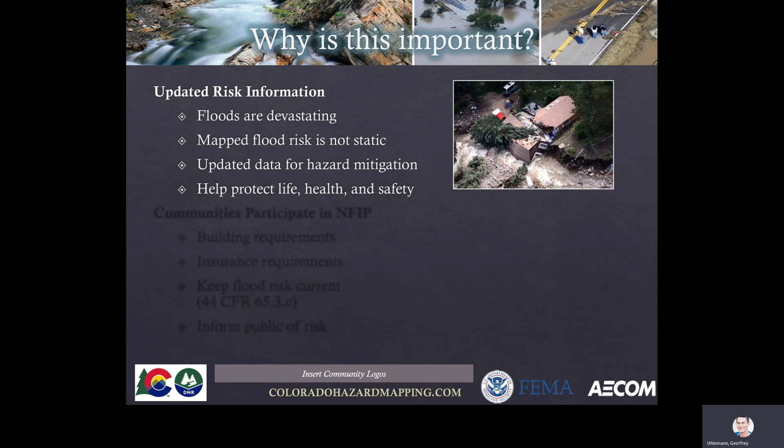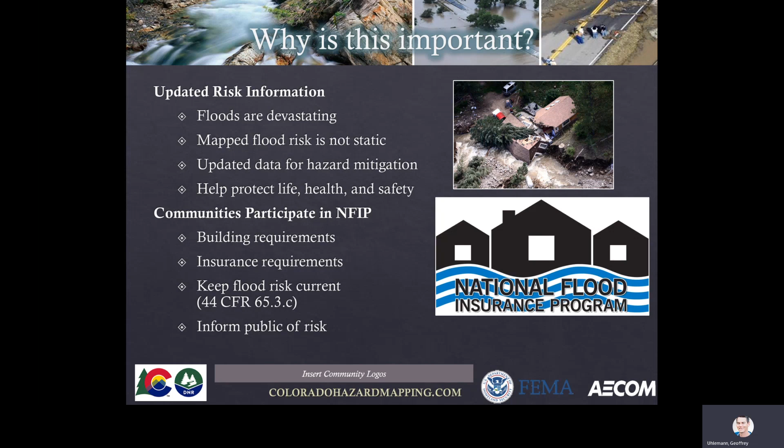There's also an official requirement for any community that's participating in the flood insurance program that this mapping information be kept current. And those participating in the NFIP, there's specific building and regulations that are associated with the program. There's insurance requirements for homeowners. And like I mentioned, as part of the Code of Federal Regulations, those communities are required to keep flood risk current and to also update or inform the public of that risk information.

So a little bit of background on the NFIP. It's a voluntary program that communities can elect or opt into. And if you're part of that program, then you can receive disaster grants and information or helpful resources after those occurrences. And then also it allows homeowners to buy insurance based on what zone they're in. If the community does not participate in the NFIP, then an individual homeowner cannot purchase insurance through that program.

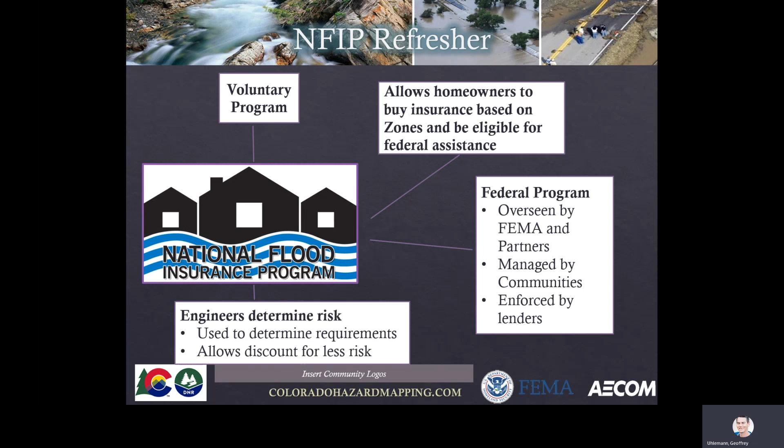And this is a program that's overseen by federal agencies, primarily FEMA and FIMA. And it's managed by the communities, enforced by lenders, and then informed often by the state. So our role here as a mapping contractor to the Colorado Water Conservation Board is to determine that risk and provide that information on flood insurance rate maps that are used by the National Flood Insurance Program.

So in terms of who's involved, there's community officials, so the local level, the state level, FEMA or the federal level, and then private stakeholders. And here's kind of an overview of some of the individual responsibilities for each of those roles. Primary message here is it is a partnership with each person kind of playing their own role.

The local community has to administer the NFIP, communicate the risk to the public, and manage local construction and enforcement of regulation and ordinances. The state is often the leader in the study with initiating these studies and overseeing them and partnering with FEMA in terms of funding.

And then often has a contractor like ourselves to help create some of that mapping information. FEMA manages a lot of the requirements, guidance, the technical specifications, and the funding for the study, and they also manage the NFIP, like I mentioned earlier. And then at times there's private stakeholders, such as like a watershed coalition that would help oversee making sure that correct data is incorporated.

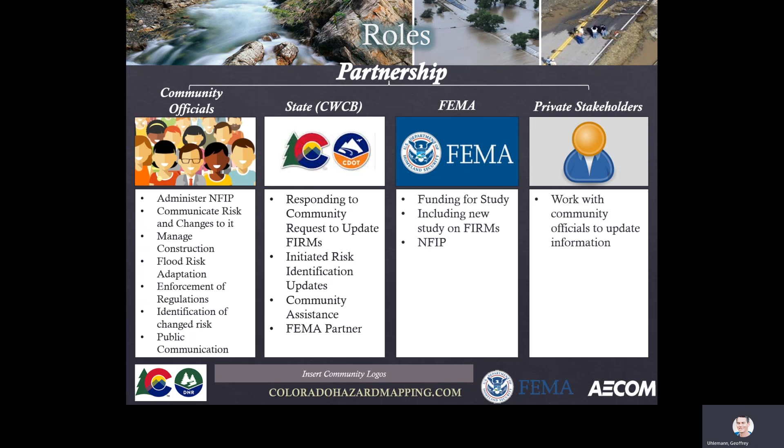In terms of what a typical study would look like in timeline, I'll go over that now.

We would typically include information on this slide here, but you can go to our website at the bottom: coloradohazardmapping.com. There's a story map, and you can find that information on your particular county level, and then you can also enter your home address if you'd like to look at a specific location.

In terms of what a typical process involves, first is collecting terrain data, which reflects the ground surface. That's usually done with something called LiDAR, which stands for light detection and ranging. It's basically flying a plane over the ground surface and bouncing different spectrums of light, and you can see the contours of the surface.

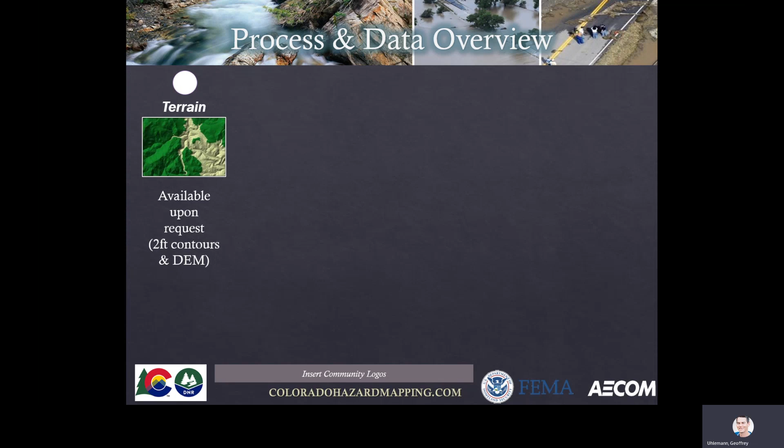Then we create a digital elevation model. Typically, this data is available upon request, either in the form of 2-foot contours or a DEM, digital elevation model. If it's a detailed study, we'll supplement it with field survey. This can be information from the actual channel dimensions below the water surface, or at any structure or crossing, such as a bridge, a culvert, a dam, a pipe, etc.

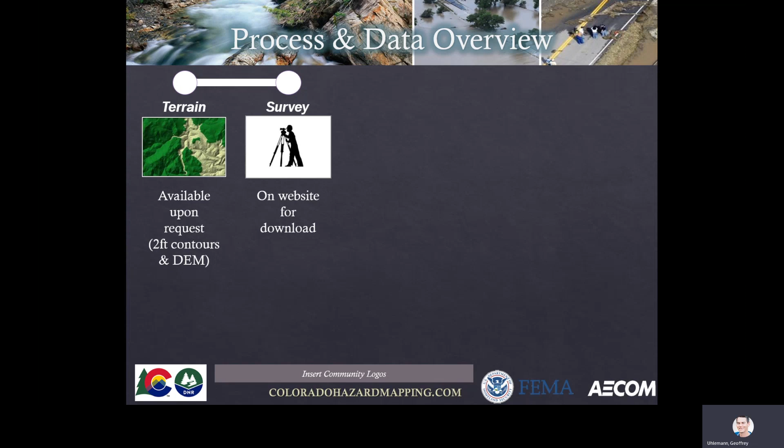And we'll put that information into our models. We also do hydrology, which is basically a study of how much water would occur during specific events based on probabilities. This is often done with stream gauges or rain gauges, but it's a statistical approach to figure out how much water would happen.

And that information's on our website. It'll show all the flow change locations that we used. And that gets put into a hydraulic model, which is also online.

Hydraulics is basically: if you were to have a certain amount of water from hydrology that's put through a cross section based on your terrain and survey, and you assign roughness and different structures, hydraulics figures out how high that water surface elevation is.

We take that water surface elevation and we interpolate it between modeled cross sections, and then we plot out a floodplain, basically where the edge of that water surface elevation meets our digital elevation model. That extent shows what we're calling our floodplain for the different recurrence intervals, and that information's on our web viewer as well.

By the time we get to this point with the public meeting, it's because the preliminary flood insurance rate maps have been provided to the communities, and it initiates a formal process of going through review, and then if accepted, they'll be adopted.

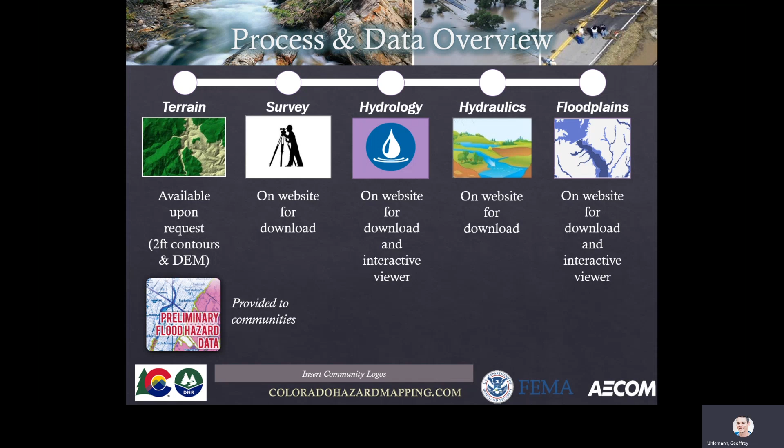If we use time 0 as when the preliminary flood insurance rate maps are first issued, then typically about a month after, we hold an official meeting called a CCO with the communities—that's with the officials. Following that meeting, maybe a month after, so 2 months after prelim, is when we typically hold one of these public meetings to overview all this information with the public.

We always try and do that before the appeal period begins. The appeal period might start another 2 months after a meeting like this. It'll begin after the issuance of newspaper articles, and those will start the 90-day period, so it'll end, let's say, 7 months out.

That is the official period during which they'll receive comments on any of the study information, and I'll go into that more later. Depending on what comments are received, maybe 8 to 12 months after the preliminary flood insurance maps are released, that might be when everything's finalized through a letter of final determination, after which there's a 6-month period for communities to adopt it.

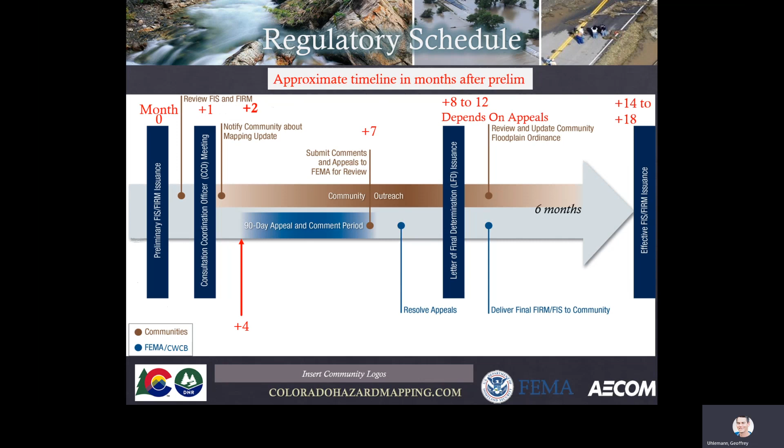So continuing through our outline, I'll show you some generic results in terms of what floodplain mapping looks like. The first question we need to ask is, do these results that we're mapping depict actual flooding? The short answer is no, but it could. What we're mapping are hypothetical or predictive simulations.

When we talk about the 100-year floodplain, it's actually properly called the 1% annual chance. That means in any given year, there's a 1% chance that a flood of that magnitude could occur. We're not trying to replicate a historic event that's already happened. We're looking at our record of data and statistically deriving potential events, like a 1% or a 0.2% chance, which we often refer to as a 500-year floodplain.

But in reality, we know the results may actually differ. Some of this is because our models are based on data at the time it was collected, which in some cases might be 2 or 3 years old by the time we get to this point, based on whenever the terrain was collected. We also know that in reality, sometimes logs or mobile homes or debris will create dams, causing water to move outside of the channel, and those things can't be predicted. So if the mapping looks different than what you've personally experienced, that could be one of the reasons why.

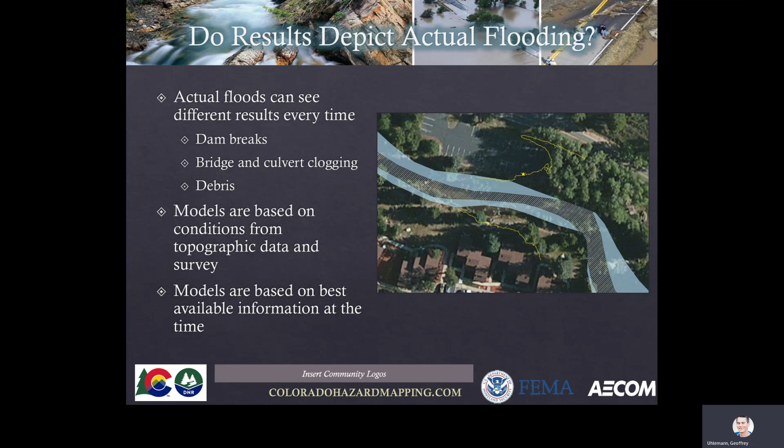In terms of what a flood insurance rate map might look like, here's an example with typical symbology. Running through the middle, kind of looking like a candy cane with red and blue hatching, that's called a floodway. That's part of the 1% or the 100-year floodplain, but it's a developmental portion. It has an additional regulation piece to it, but it's still part of the 100-year floodplain, which you see here in blue, called Zone AE.

So anything that's a Zone A, whether it's AE, AO, AH, or just A, is going to be a 100-year or 1% chance floodplain. AE specifically denotes an enhanced or detailed portion. What you see in orange is the 500-year or 0.2% chance, often called a shaded X, which has different connotations. It's not part of the special flood hazard area. Anything in the special flood hazard area, basically your Zone A's, has different insurance requirements - it's a mandatory purchase if you have a federally backed mortgage.

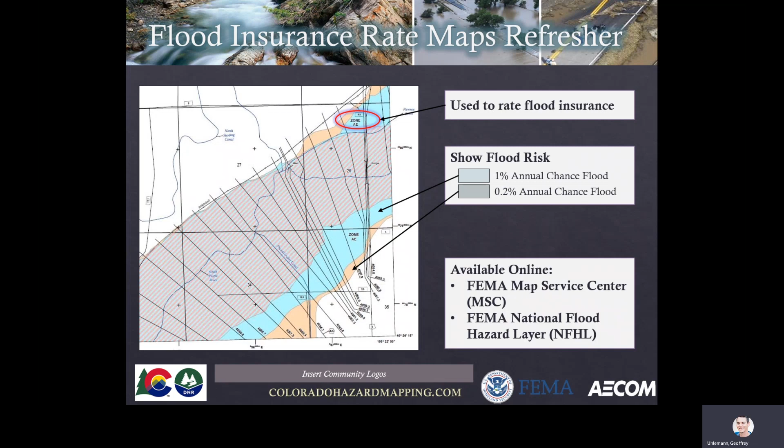The black lines going across that are generally straight are cross sections, so this would have been modeled using a one-dimensional model. You have a cross section at each one, and it interpolates between them. A 2D model would look different, often having a mesh or grid overlaid on the area. All this information you can find on FEMA's Map Service Center or the National Flood Hazard layer for current effective mapping, as well as anything preliminary, which should be your county by the time we're at this meeting.

In terms of floodway, this is a developmental restriction, and the sentiment behind it is to not impact your neighbor. So when we model this, we encroach on each side with approximately equal conveyance in order to see how far you can come in from the edges of your 100-year or 1% floodplain before it raises the water surface elevation by a half foot.

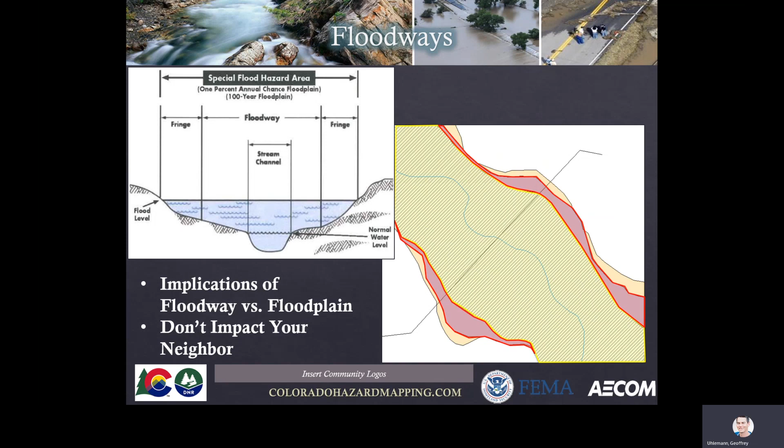At least in Colorado, it's a half foot. The reason why is you don't want a developer coming in, putting in a large warehouse that constricts flow and raises the water surface elevation by over a half foot, now flooding your property. So it's a way of protecting future development. Anything outside of the floodway we refer to as the fringe.

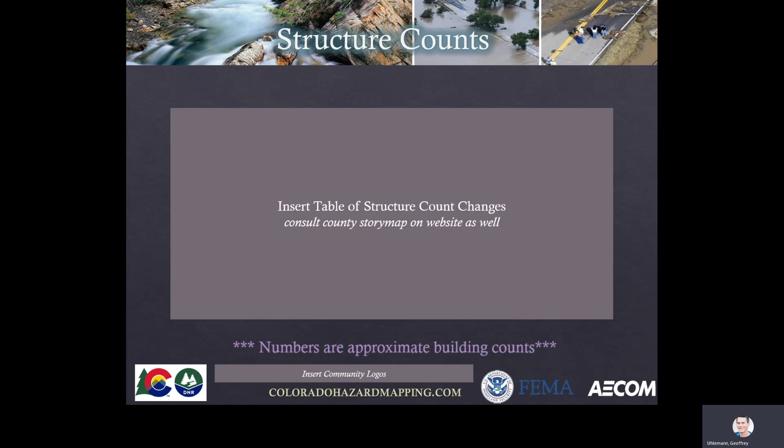This slide is a placeholder for where you might see structure count information in terms of changes if you're already in an effective floodplain - those that might be added in or mapped out - but you can find this information as well on the website.

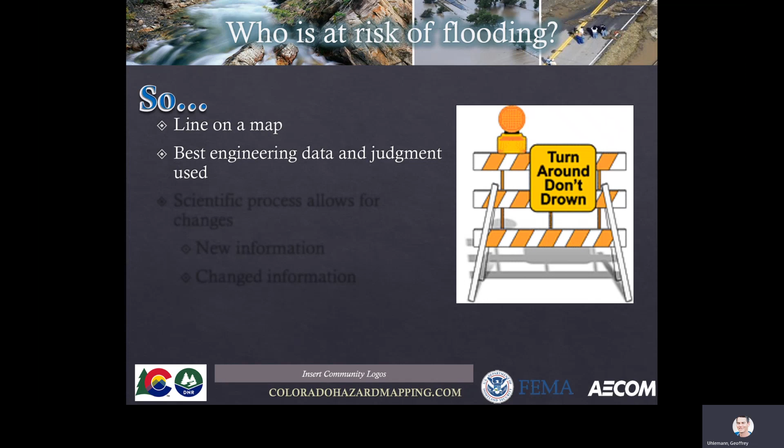The takeaway here is in terms of who is at risk of flooding, keep in mind this mapping is a line on the map and it's a best estimate, but it's not absolute, and floods don't care how we actually map it in reality. We're doing our best engineering judgment using data available at the time, but things can change and there can be new information and new conditions. So really everyone can be at risk of flooding to some degree.

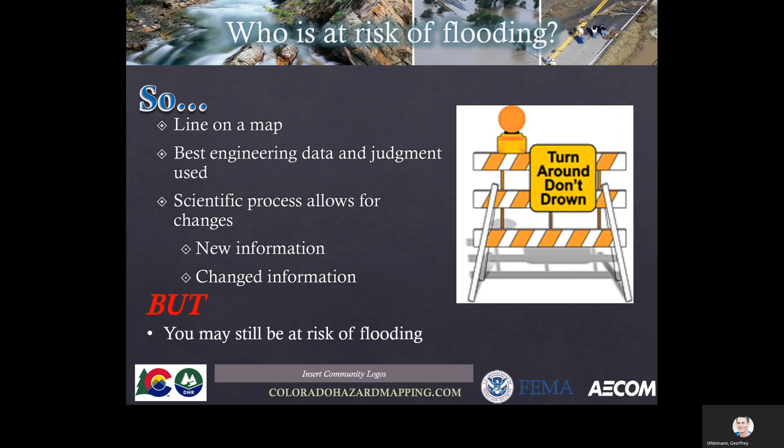So to wrap this up, we're going to look at some information on insurance, appeals, and additional resources.

When it comes to insurance, if you've already been in a floodplain and now you're being mapped into a different zone, the requirements might be slightly different depending on what zone you're in, but the program requirements haven't changed—it's just that your risk profile at your specific location has. In the NFIP, insurance is required for any federally backed mortgage. Your lender will require insurance if you're in a special flood hazard area, anything with a zone A. However, lenders can require flood insurance anywhere based on their own discretion, so even if you're outside a special flood hazard area, they might require it anyway—that's up to them to decide.

Also, in terms of the federally backed mortgage, if you own your home outright, that mandatory insurance purchase requirement isn't applicable. It becomes optional—we would still recommend it, but it wouldn't be required. You can purchase insurance anywhere within the county; you don't have to be within an actual mapped floodplain. You could be outside one, and the rate of your insurance will be affected by what zone you're actually mapped in, so we'd still recommend looking into that.

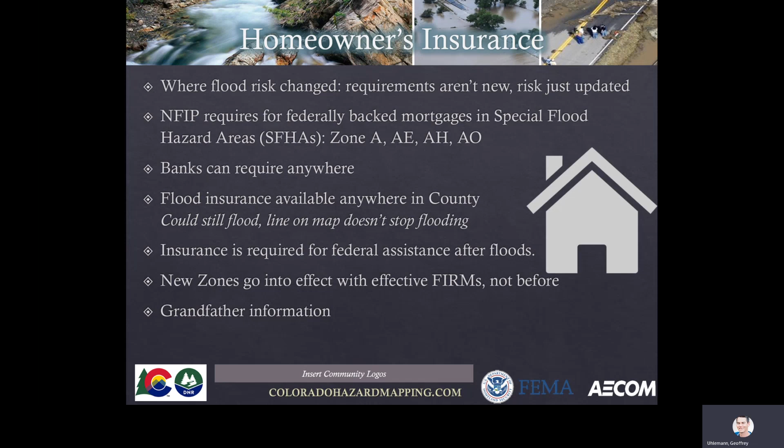So on that note, you could get a preferred policy now, depending on if you're going to go from a lower risk to a higher risk zone. You could buy now, get a better rate, and be grandfathered into that. There are a lot of nuances that go into grandfathering. The takeaway here is you could get a preferred policy before you're mapped into the floodplain.

Also remember, this doesn't mean you're at no risk if you're outside a mapped floodplain. You could still consider purchasing flood insurance. Based on the base flood elevation—the water surface elevation of the 1% flood—and how that compares relative to your structure information, that may impact your rates as well, and how you are grandfathered in if you did choose that route.

And let's say you wanted to change this—you could look into different options, either a letter of map amendment, a LOMA, or a letter of map revision, a LOMR, and we'll talk about those shortly.

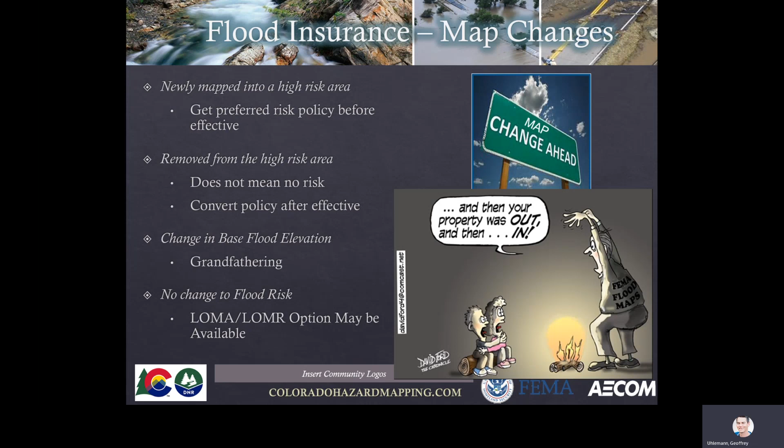As I mentioned earlier, there are development implications, and this will vary by county, but any community participating in the NFIP does have to enforce certain building restrictions, requirements, and ordinances surrounding that. So you'll want to talk with your community about what specifically affects you.

It's noteworthy that there are more restrictions if you're within a floodway—it's more difficult to build or rebuild. The best person to talk to would be your floodplain administrator, as the rules do change by community.

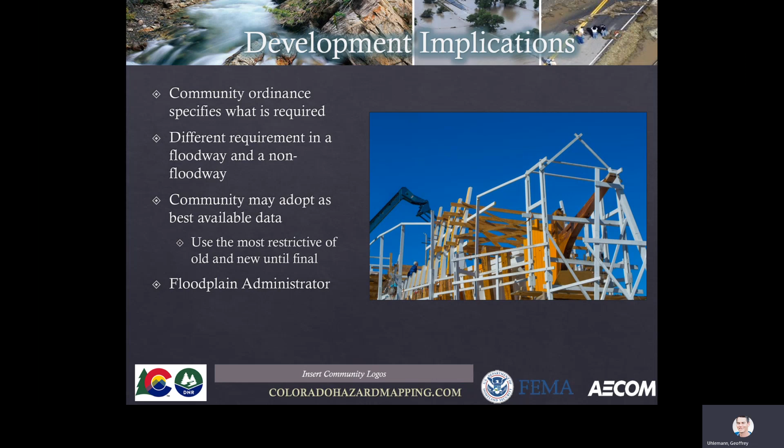So maybe you're asking, what can I do with this information? Is there anything I can do to change it? The short answer is there are a couple routes you can take, but in terms of the information as it stands, you can change it if you have technical data to support it. Simply saying 'it hasn't flooded before' or 'that wasn't my experience' or 'I disagree with this' isn't enough. But if you have technical data such as survey information, new topographic data, or an actual hydrologic analysis, that could be reviewed and incorporated, and if approved, it could change the study information. That would appeal the existing preliminary maps before they become effective.

Now, if you wanted to wait until after that process, or let's say you're doing changes or improvements after the study was already conducted or initiated, that would be captured later in a letter of map revision. For it to be an appeal, it has to be data that existed when the study was conducted.

Now, if you don't need to change the mapping itself, but your structure is higher than what's reflected in the mapping, your structure itself could be pulled out of the zone designation through a letter of map amendment. That would change your structure assignment without actually doing a new study or new mapping.

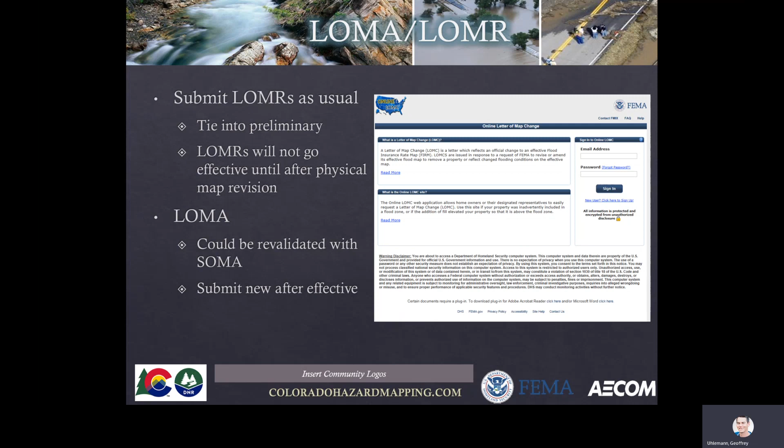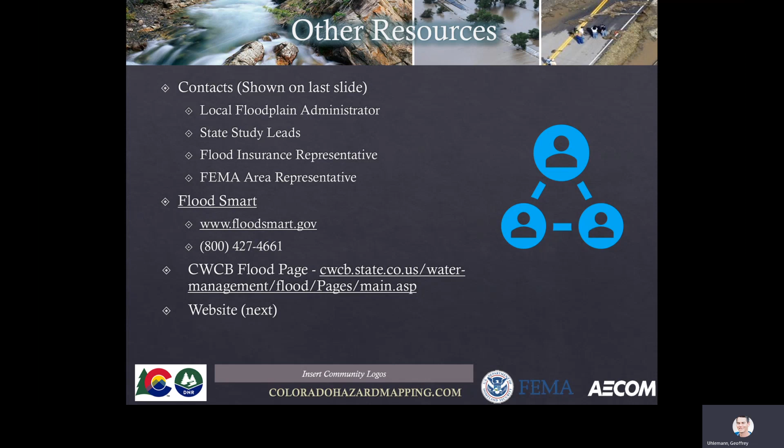In terms of other resources, we'll show some examples on the last slide, but you'll want to contact your local floodplain administrator for specific questions for your community. You can also reach out to the state or FEMA on specific questions about the study, insurance, or compliance. There are also a couple of websites listed here with information on flood and how to prepare for it and mitigate.

We also have a website with more information, as I've mentioned. The URL has been on the bottom of the page or presentation the whole time. There are a few different tiles: information on flood hazard and county specific projects, a library with all the documents, an interactive map showing all our areas, FAQs, and community rating systems, more used for community. As a homeowner, you'll mostly be interested in the flood hazard tile.

When you go there, there are a few different options. At the top, you can enter your address, place, or town, and it'll zoom there, presenting information on the current mapping and also the proposed updated mapping. You can also look at a specific county and see all the information that went into it, including terrain, hydrology, survey, and hydraulics. You can look at floodplain maps and all the meetings that have happened, so there's a bunch of information there. At the bottom, there's more generic information like fact sheets, tutorials for our website, and other floodplain mapping considerations.

To conclude, the main message here is that the results are showing risk that is already there. We're just now putting it on a map, but that risk has been there all along. The data is not perfect or absolute, but it's based on best available information. This data will eventually be used for the flood insurance rate maps, perhaps a year out depending on the time frame for your specific project. The floodplains are not effective until those FIRMs are released, so you could take advantage now of perhaps being grandfathered in.